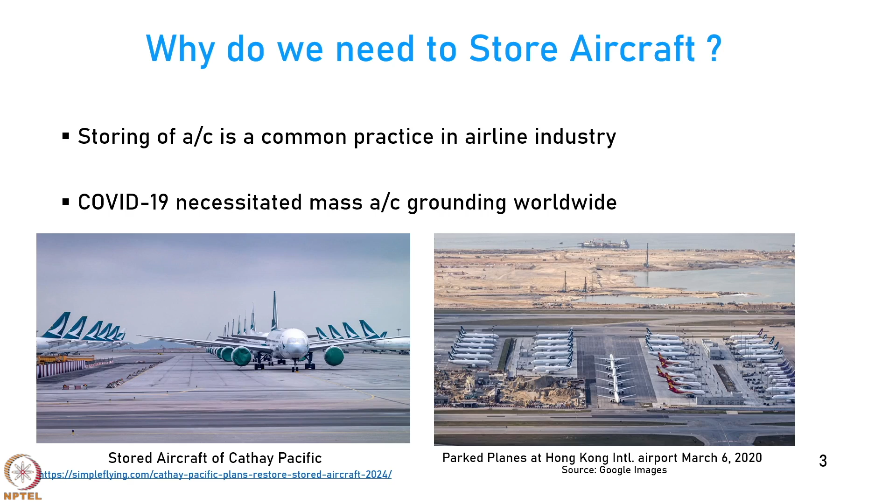But the world noticed about aircraft storage recently during COVID-19, which necessitated mass grounding of aircraft worldwide. So after COVID-19, people came to know more about aircraft storage. For example, you can see in this image, a large number of aircraft have been grounded at Hong Kong International Airport on 6th March. This is the photograph taken. Due to COVID, there was a worldwide drop in demand and airlines had to store the aircraft. You can notice that different types of aircraft, small, medium, large, all of them have been stored.

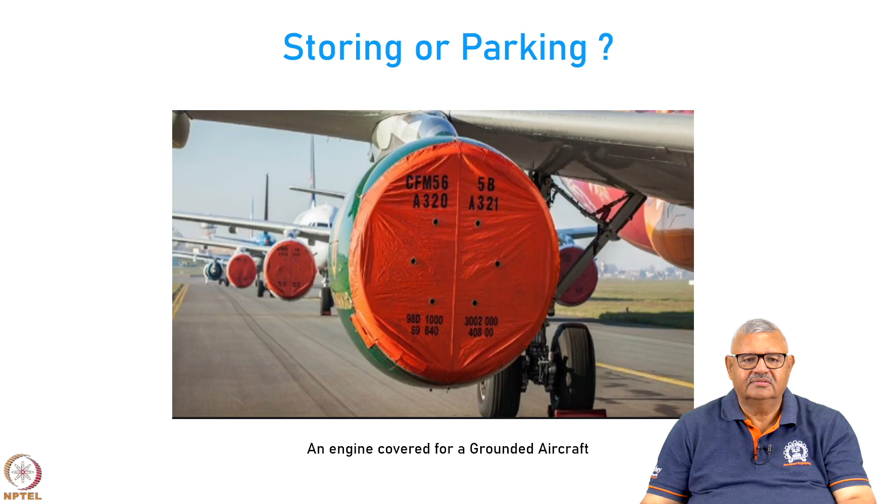So the question arises is, should we store or should we park? This is an example of an engine which is covered for grounding the aircraft. This is not into storage, this is into some parking. Now, parking versus storage is a very important question.

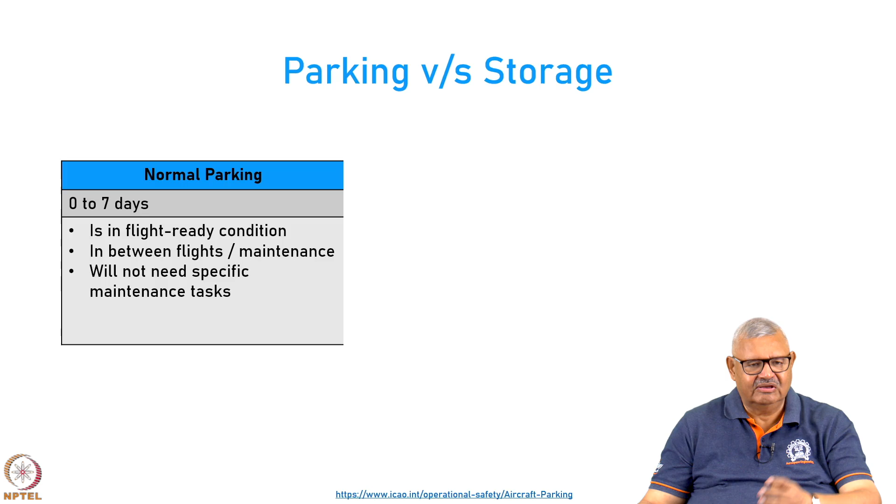Normal parking is for up to a week period, where the aircraft is in flight-ready condition and in between two flights, or because there is some maintenance going on, you need to park the aircraft. You will not need specific maintenance tasks to be done if it is up to one week, or normal parking.

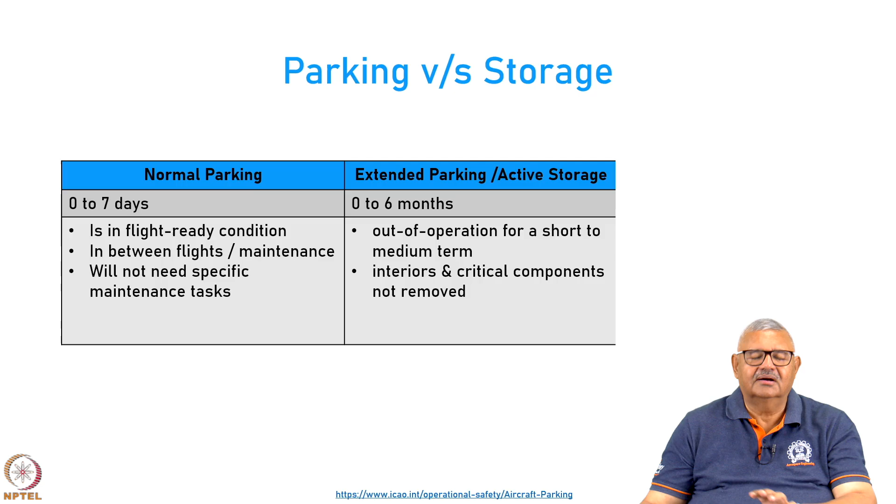But it could be extended parking, also called active storage. This is for up to half a year. Here, because of the lack in demand or lack in the ability of the airline to offer the service, the aircraft is out of operation for a short to medium term. Here, what we do is we do not remove the interiors and the critical components, we leave them as is, but we provide facilities to store them properly.

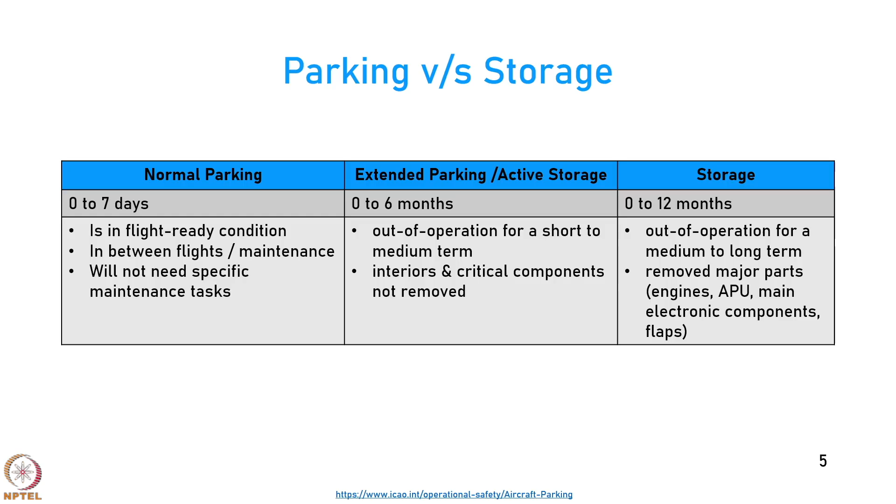Then you have long term storage, up to one year. Here the aircraft is out of operation for a medium term to a very long term. In the case of storage, we remove the major parts. For example, the engines are removed, the auxiliary power unit or APU is removed, the main electronic components are also removed, flaps are also removed, and the aircraft is then stored.

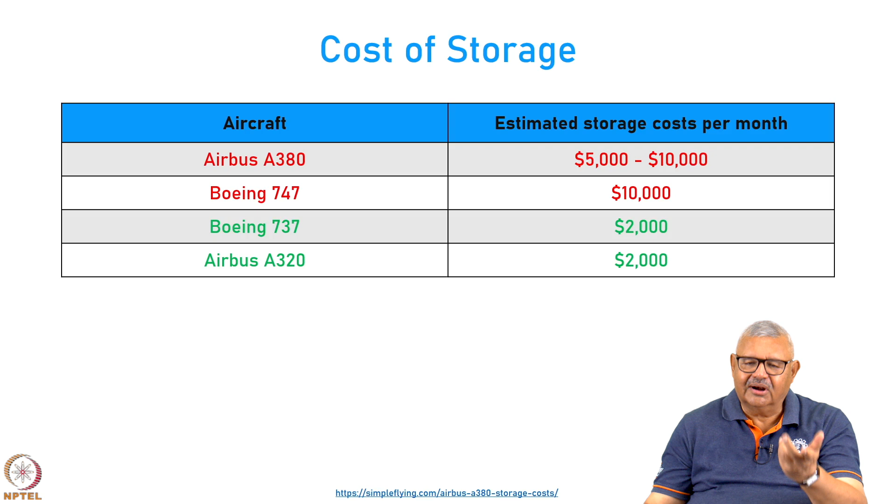Storage is not going to be at a low price, it is very expensive. For example, an aircraft like the Airbus A380 can cost up to $5,000 to $10,000 per month to store. A Boeing 747 is also a large aircraft, it costs about $10,000 to store. Smaller aircraft like Boeing 737 and Airbus A320 may require only about $2,000 per month to store.

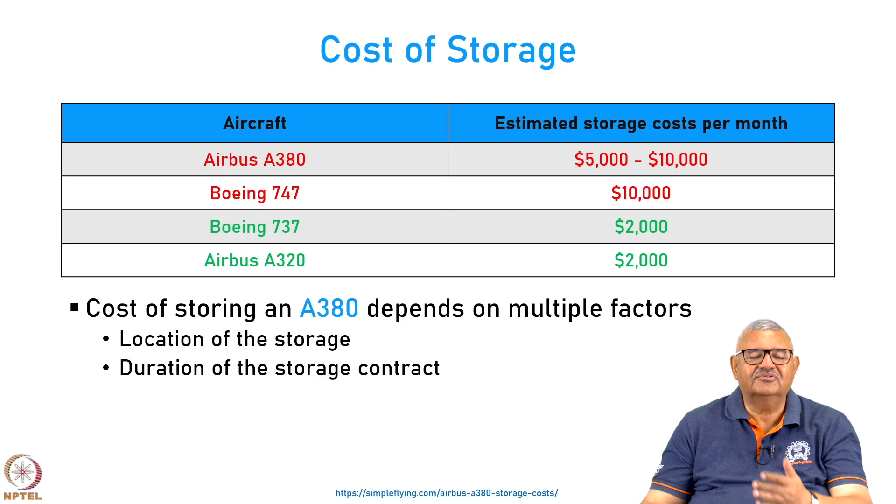Now, the cost of storage of a large aircraft like the Airbus A380 depends on multiple factors. What are these? Where is the storage? How long is the storage expected to be? Is it one year or a few years? And what kind of maintenance or ground handling is required during the storage period? All these decide the cost of the storage.

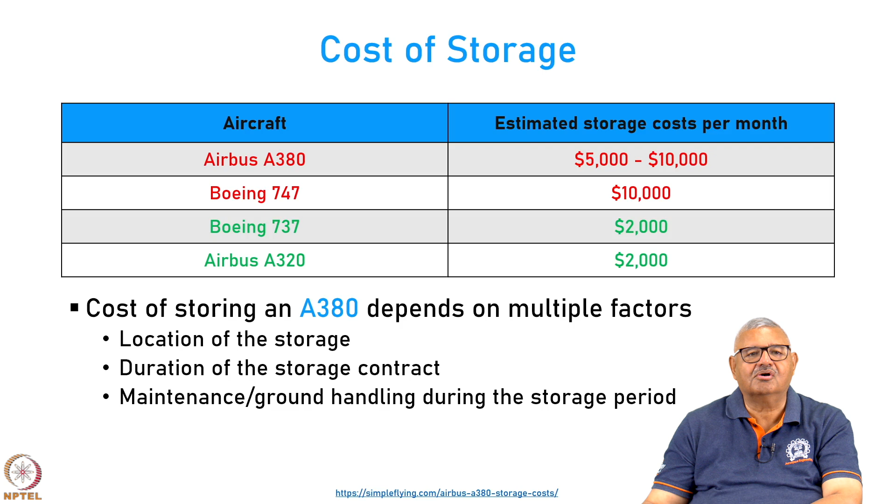Now, there are many aircraft boneyards and storage facilities available. Boneyards serve various functions. Number one, they allow temporary storage of aircraft. They also allow maintenance to be carried out on these aircraft. In some cases, we scavenge the parts from the boneyard aircraft because they are not going to be used, but the spare parts can be used. And sometimes we want to use the boneyards for scrapping the aircraft, so we have to put it at some place where it can be scrapped. That means the parts can be removed and sold as raw material.

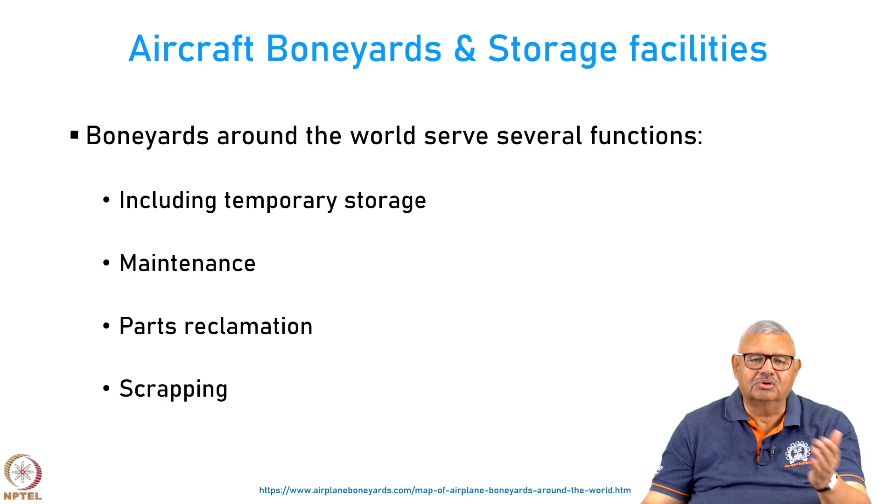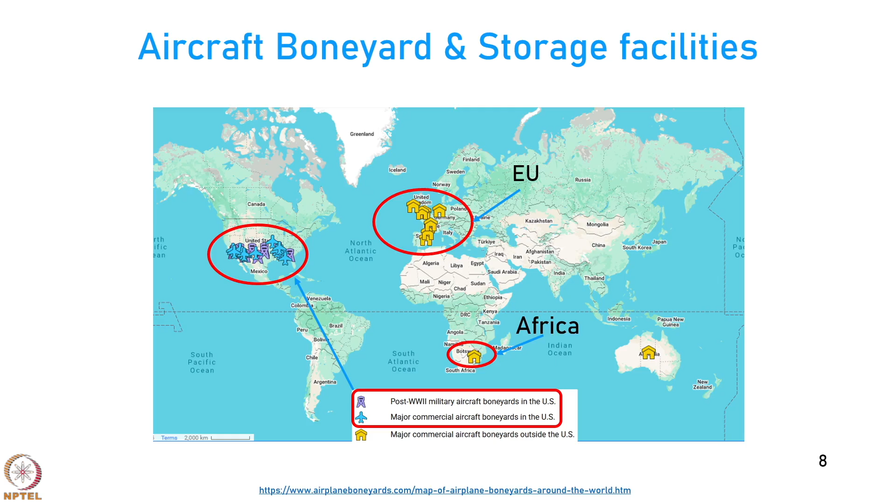Now, let us have a look at the aircraft boneyard and storage facilities all over the world. Broadly speaking, there are 4 locations. In the US, there are certain boneyards as well as some commercial aircraft boneyards. Then in the European Union, we have some locations, especially in Spain. Then we have in Africa, in Botswana, and we also have it in Australia.

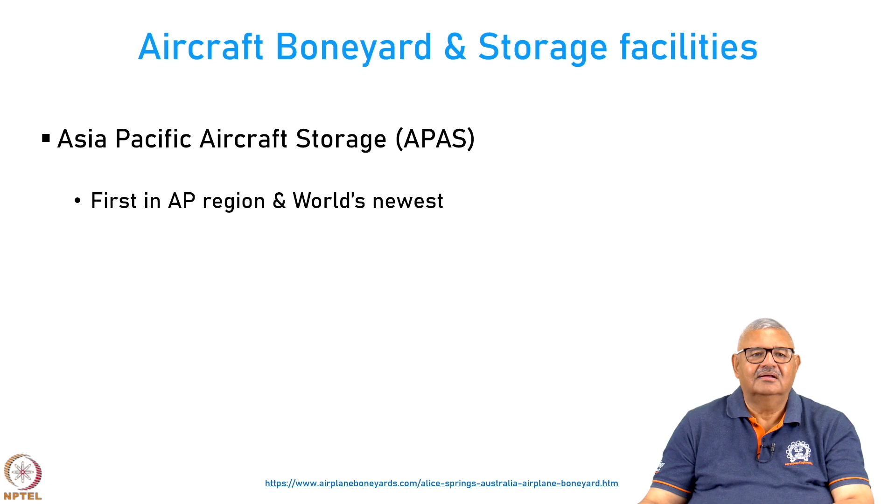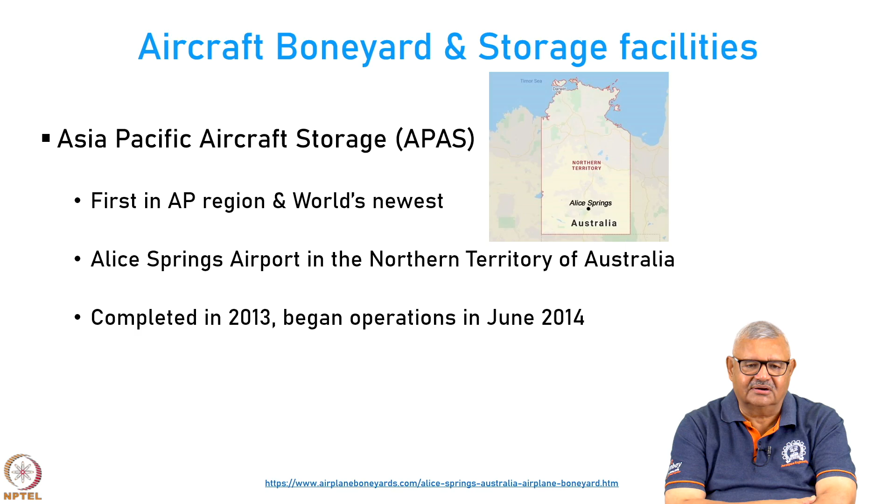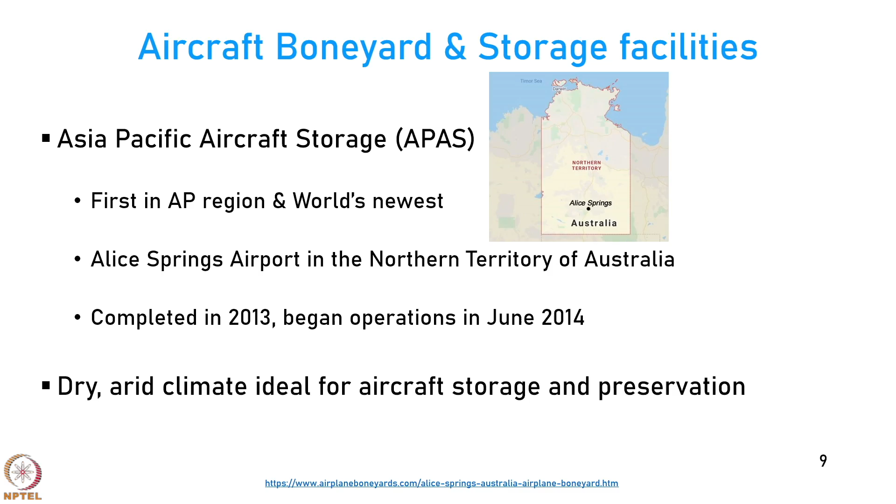Now, the Asia Pacific Aircraft Storage in Australia, or APAS, is the latest and the first in the Asia Pacific region. This is in Alice Springs Airport in the Northern Territory of Australia. This particular boneyard was completed in 2013 and it began operations in 2014. The dry arid climate at this location is very much suitable for aircraft storage and preservation. In fact, boneyards are located mostly in dry and arid locations.

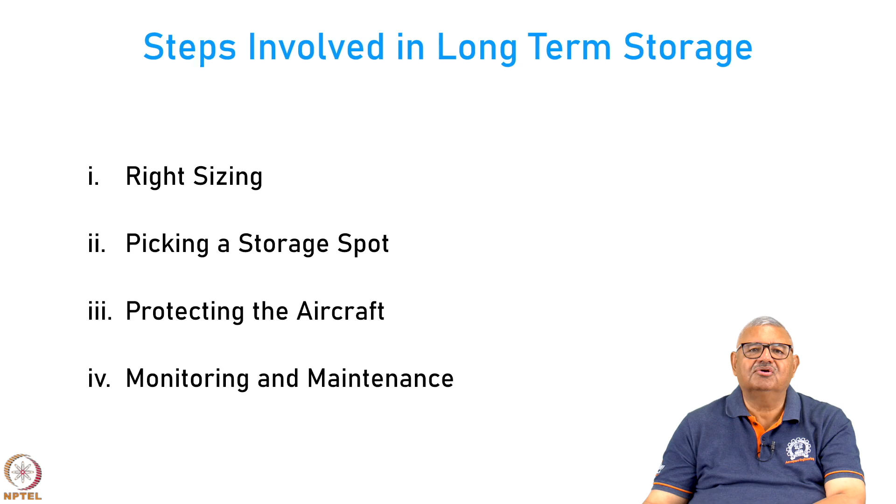Now, there are many steps involved in long term storage of an aircraft: right sizing, picking an appropriate storage spot, protecting the aircraft appropriately, and monitoring and maintenance of the aircraft. These 4 steps are very important whenever we go for any long term storage. By long term, I mean more than a year.

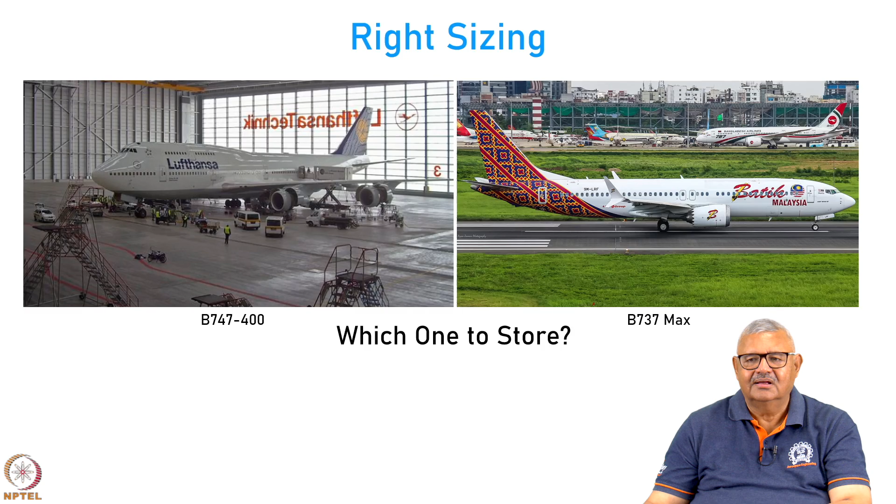Right sizing. Here is a large aircraft, the Boeing 747-400, and here is a small aircraft, the Boeing 737 MAX. The first question that the airline has to answer or decide is which one to store. Depending on the requirements of the market and their own ability, they will either store a large aircraft or a small aircraft. Selecting which aircraft to keep active and which to park is an important decision, based on this fundamental question: how much use will we get out of this aircraft if we keep it active?

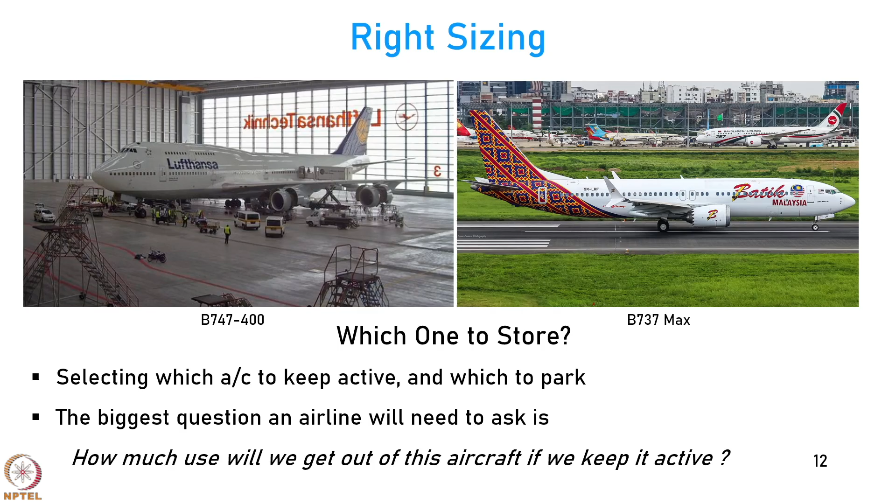If the answer is that there will be substantial market utilization, you do not store it. If the answer is no, there isn't much demand for this type of aircraft in our current operations, then you store it.

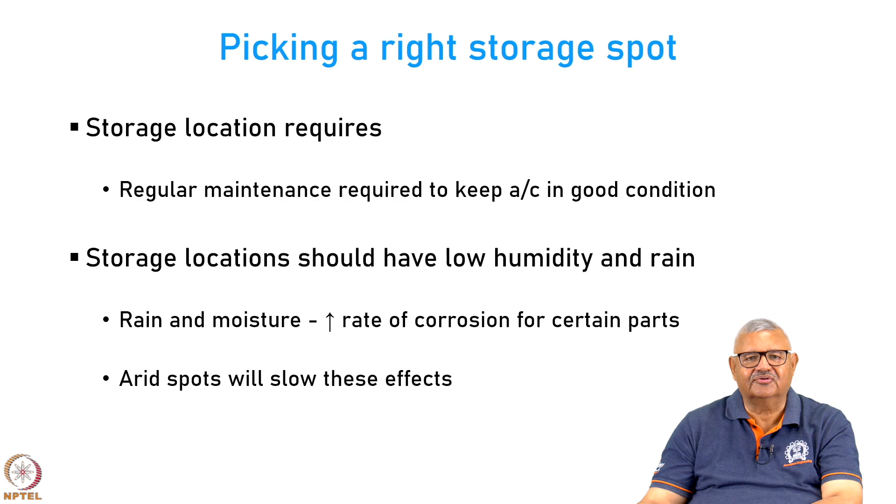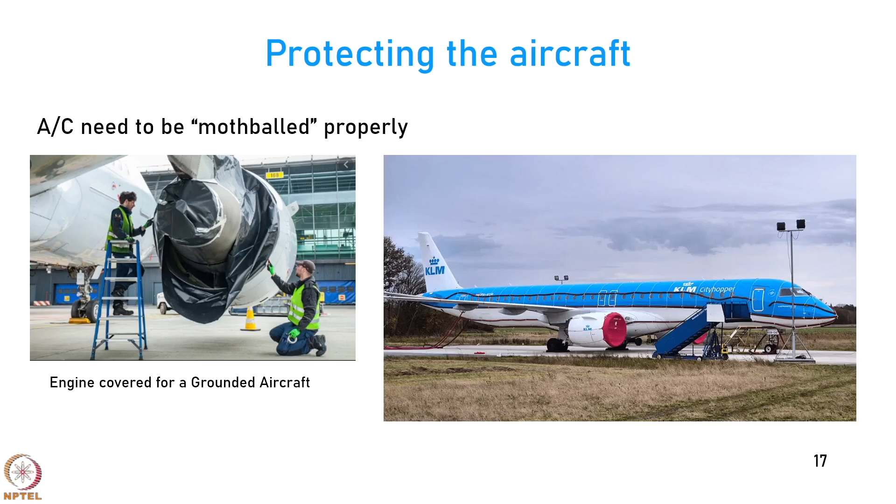The third step is to protect the aircraft appropriately. You have to mothball them properly. You have to cover the engines, and you have to also protect the whole aircraft. Here is an example of an aircraft in storage before the process is done, and the same aircraft with a mothballing system applied.

And then, notice that there are these locations from where we can have suction of the air.

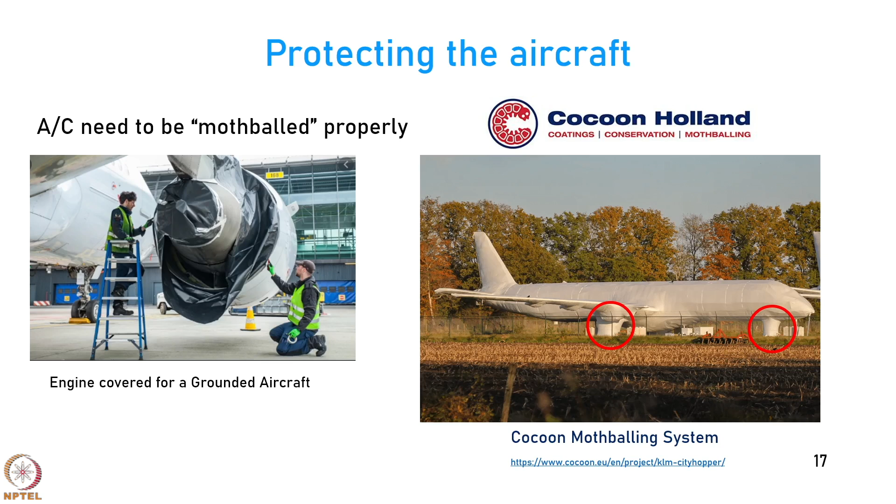So, this is how you mothball the aircraft, so that the elements do not play a role. The third aspect is to keep in mind the procedure for storage and parking.

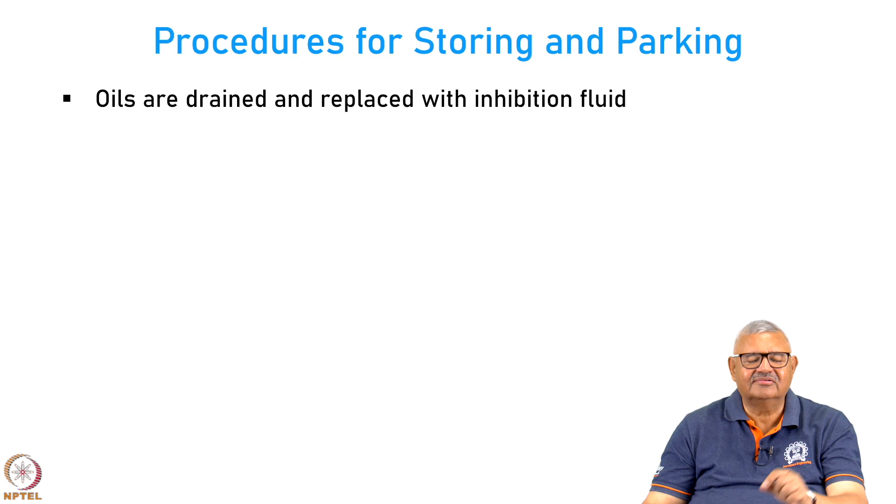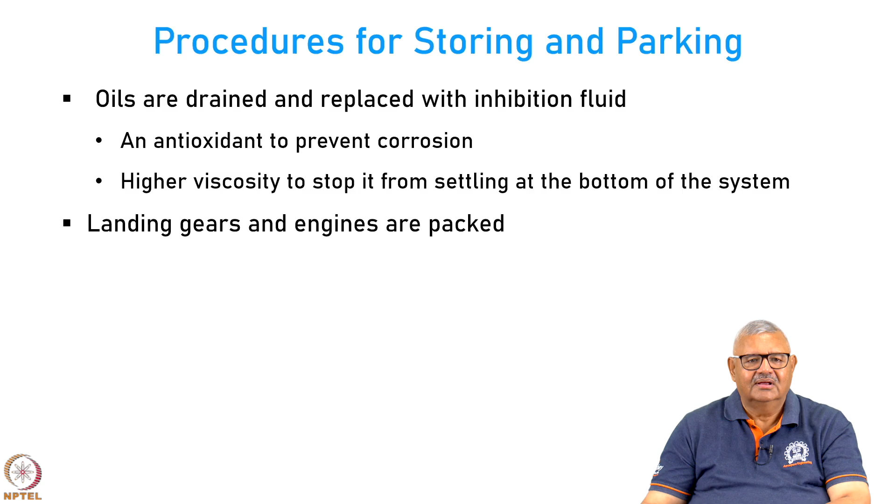First, we remove all the oils and replace them with something called inhibition fluid, which does not lead to any corrosion. This is an antioxidant, and it also has higher viscosity to stop it from settling at the bottom of the system. Then the landing gears and the engines are packed.

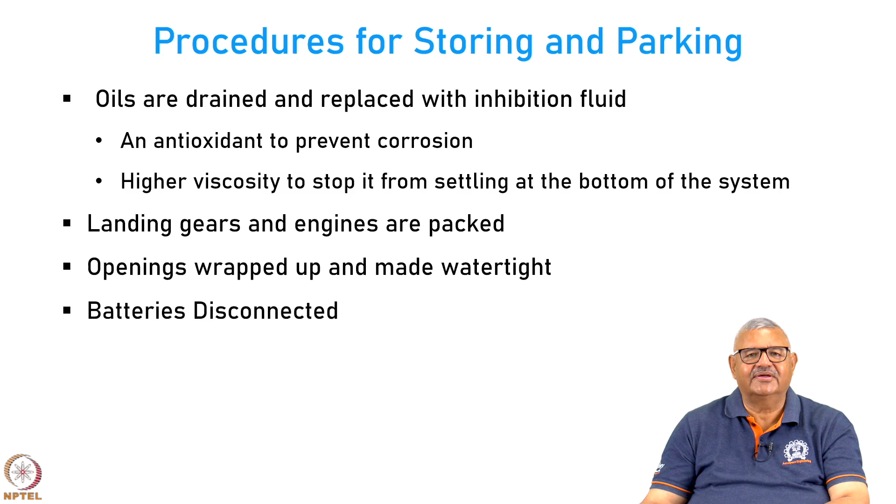So, the openings are wrapped up and made watertight, so that no moisture enters inside them. The batteries are disconnected so that they do not discharge. All the seats inside the aircraft are covered, and the outflow and fan exhaust valves are closed to ensure there is no entry of any undesirable elements. For example, insects and birds can nest in an aircraft if the exhaust openings are not properly closed.

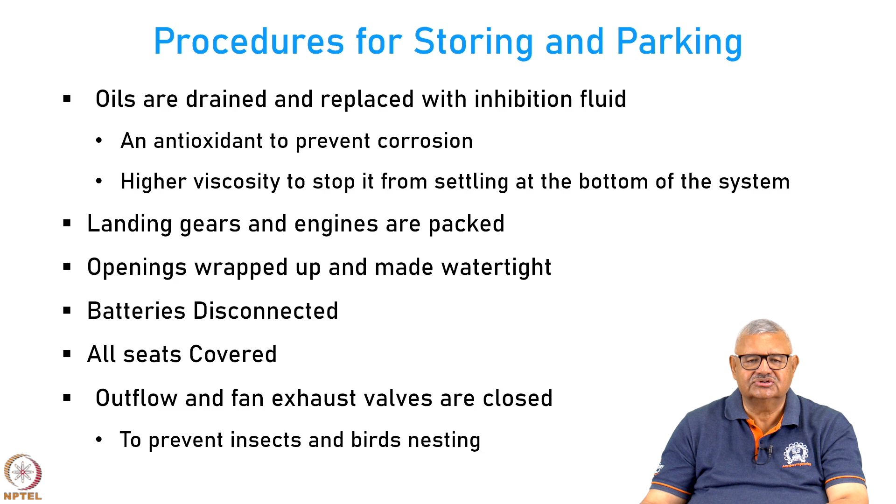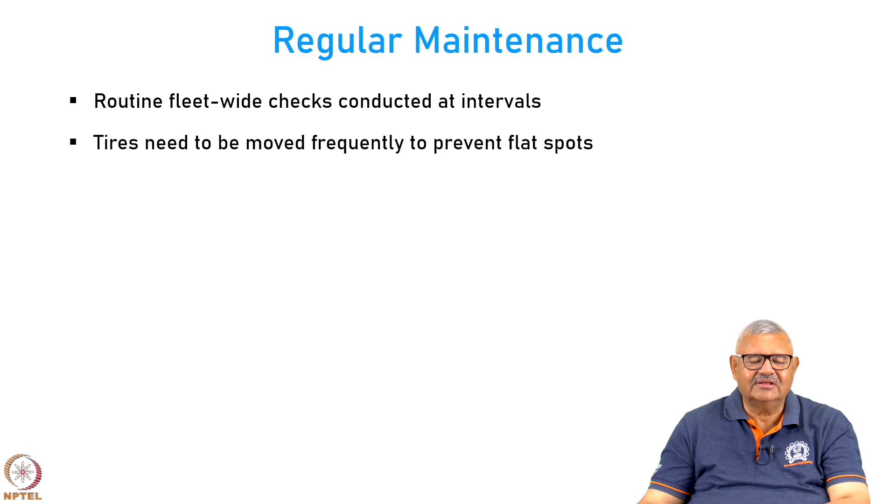Lastly, we need to provide regular maintenance of the aircraft when they are stored. So, when you store the aircraft for a long period, you need routine fleet-wide checks conducted. You need to look at the tires, because if they are standing at one spot, they will develop flat spots. So we have to ensure that either the tires are lifted, gear by gear, or you roll them a short distance so that they do not stagnate at one particular point.

Then if you look at an engine which has got a low pressure spool, you turn it manually after every 45 days, especially if you store it outside. This is to ensure that there is no jamming.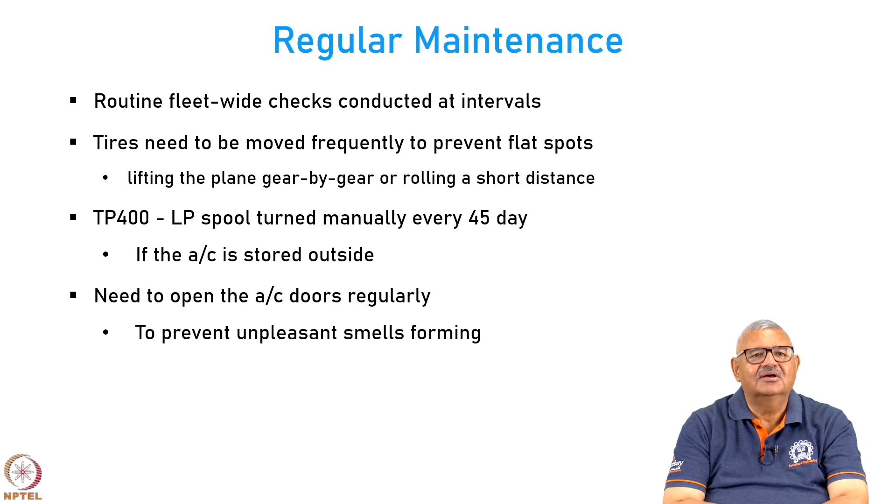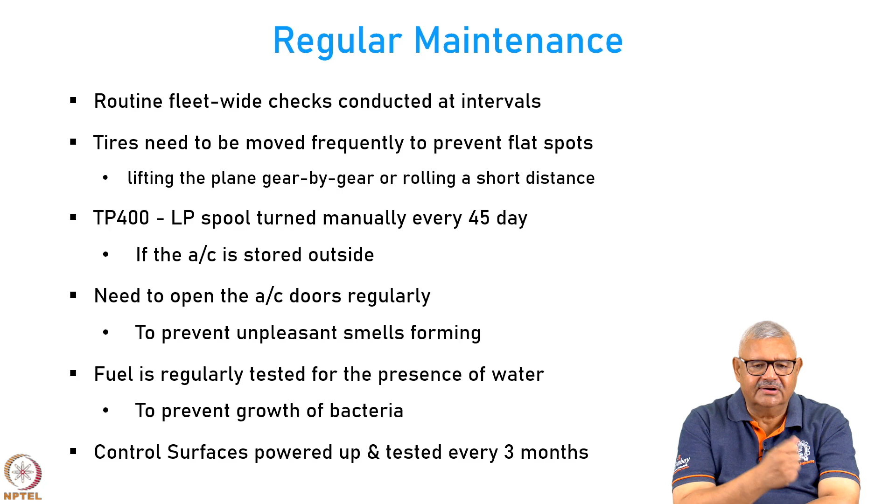Then the aircraft doors have to be opened regularly, so that we do not have any unpleasant or fouling smells created inside. Then the fuel in the aircraft is tested regularly for the presence of water, because water in the fuel is going to promote the growth of bacteria. The control surfaces of the aircraft are powered up and tested once every 3 months, so that there is no jamming or problem there.

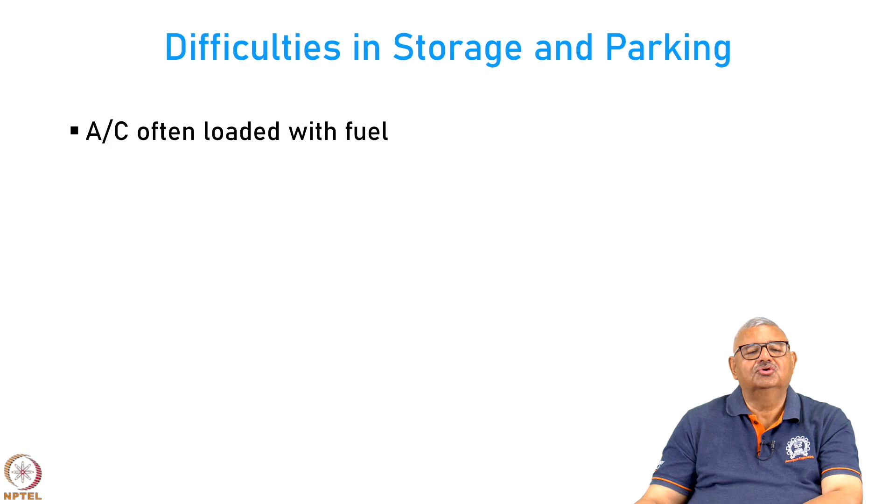But there are some difficulties when you store and park the aircraft. Often you will load the aircraft with fuel present there to keep them from rocking in the wind, because otherwise they will start moving with the wind, and to ensure that the fuel tanks stay lubricated.

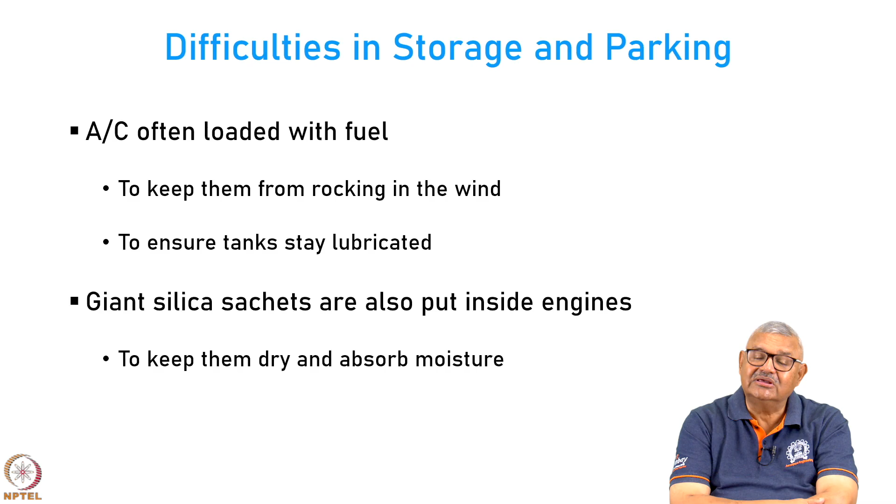Then sometimes inside the engine you put very giant silica sachets. The purpose of this is to keep them dry and to absorb the moisture.

Now, once you decide to reactivate the aircraft after storage, you have to obtain what is called a certification for release to service. This is a very important document which certifies that the aircraft is ready for operations. This is issued after several stringent checks are performed on the aircraft.

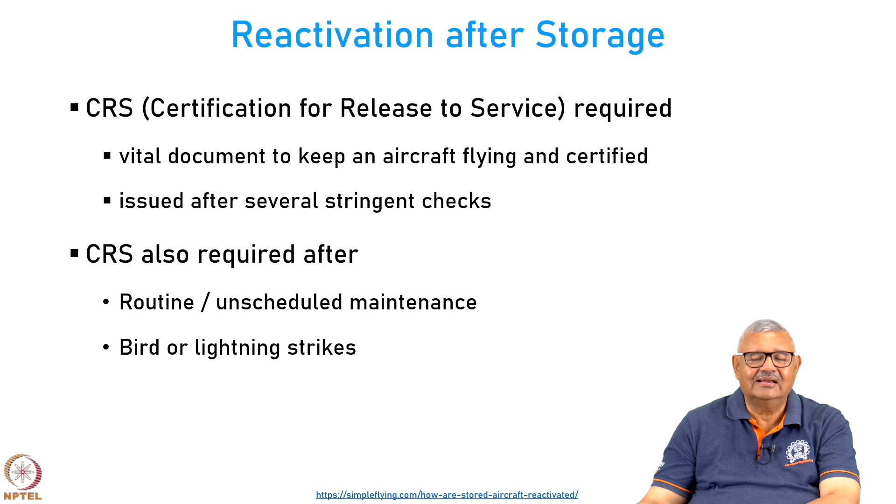But CRS is not only required when you reactivate the aircraft from storage, it is also required after routine or unscheduled maintenance, or after any bird strike, or after lightning strikes on the aircraft. It is a very standard documentation which is required, because it confirms that the aircraft can be released for service.

And lastly, before you actually release the aircraft for operational usage after a long-term storage, you need to do some flights to check that everything is working properly. So, you have final flight checks by pilots.

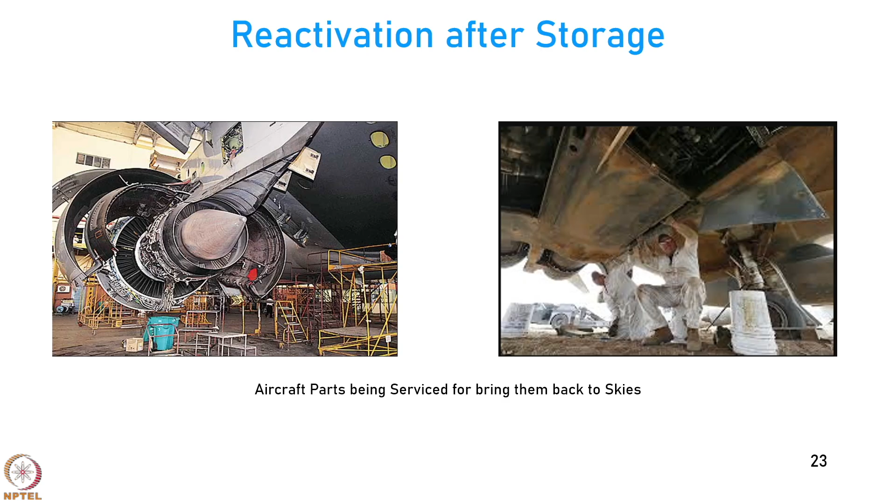Interestingly, about 100 working hours might be needed to return a wide body aircraft to service after it is stored. So it is not a small operation. You can see the aircraft parts being serviced for bringing them back to the skies. It requires lots of man hours to really do it.